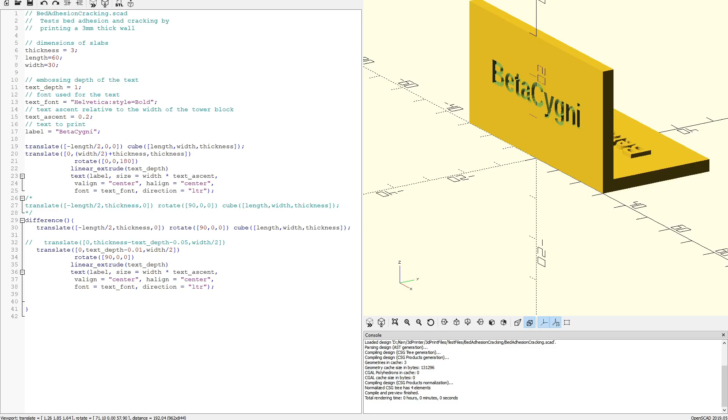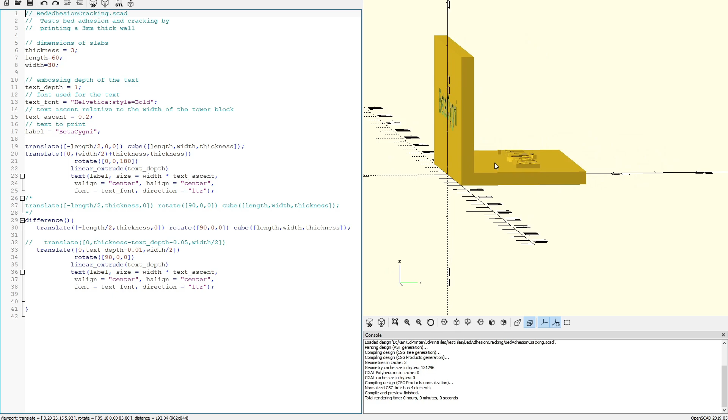Alright, so that test went well, and we got good bed adhesion at 40 degrees centigrade, and 225 was a good temperature for printing. I've said on other videos, I don't think there's an exact temperature that's always best. A few degrees here or there isn't going to matter that much.

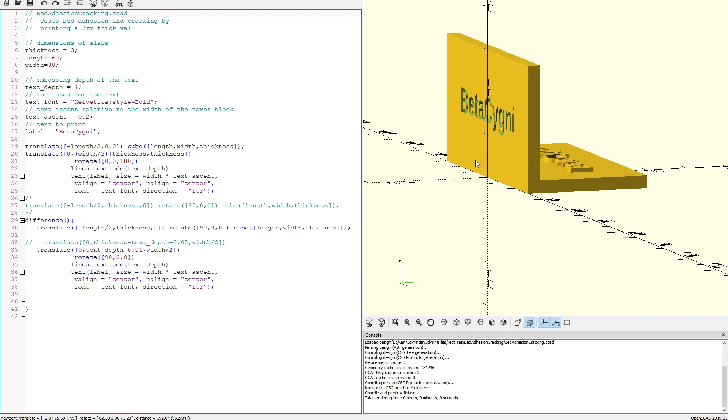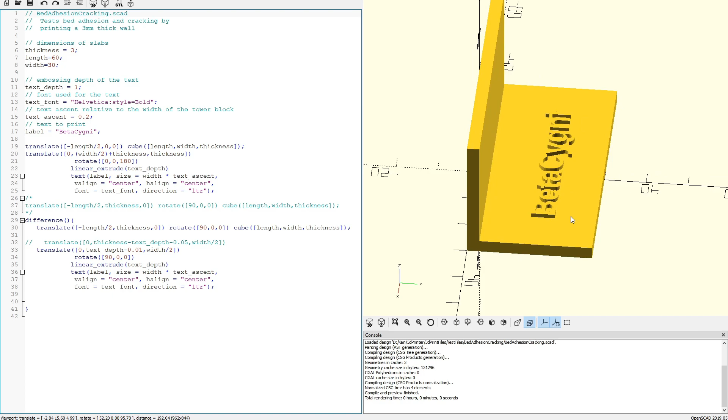And so here's my layer adhesion and cracking test. It's just a simple right angle, and the base helps test bed adhesion. So if any of the corners are curling up, it means you don't have good bed adhesion. This corner right here is the weakest point, so if you're not getting good layer adhesion, it'll crack right here. We'll be testing that when we print this.

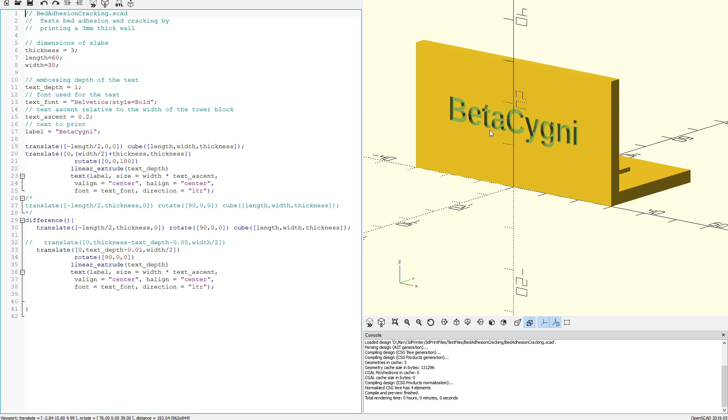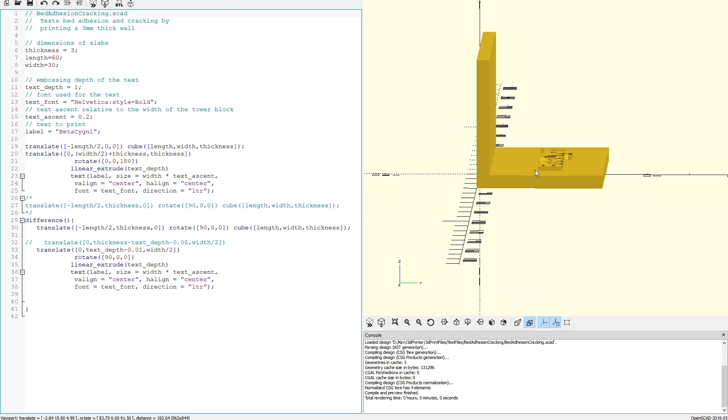Also, I threw in some raised and inset letters to see how the details are. This gives a good contrast to the flat surface to see how the cooling is working, as far as not remelting the surface when you're doing these letters in little small areas. So this is a great test.

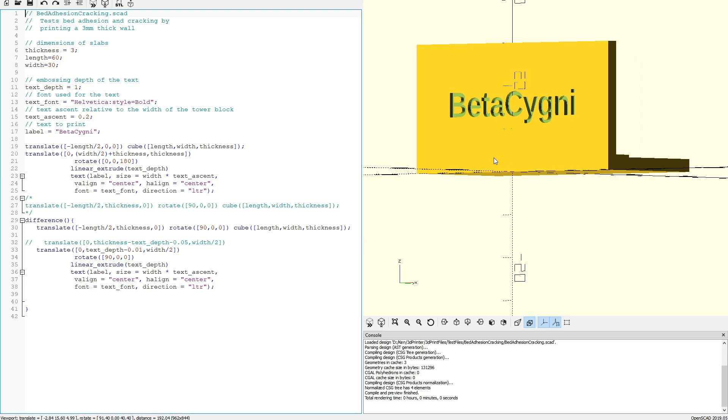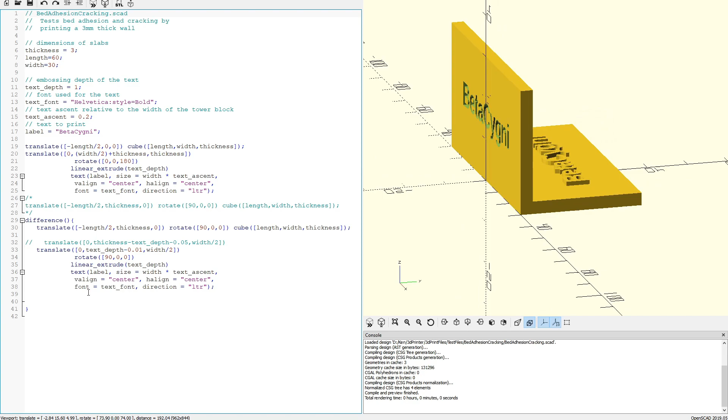The only difference is going to be when we go over to Simplify 3D and we set the temperatures and the cooling. Let's go over to there, I've already loaded it in. Here's our STL file from the OpenSCAD.

For our process, everything is default. We get the temperature, we got 40 degree bed temperature and 225 on the nozzle, and cooling after the first layer with PLA. After the first layer, we're doing 100% fan speed.

And we're helping control the temperature when it gets cold in the garage by closing the lid and the door and using a heat lamp. I've shown that on some other videos for the intake air into the printer. Because the Flashforge is an enclosed printer, you have a lot better control over the temperature, so it prints much more consistently.

I'm never going to buy an open frame 3D printer. I'm not interested, what I want is consistency.

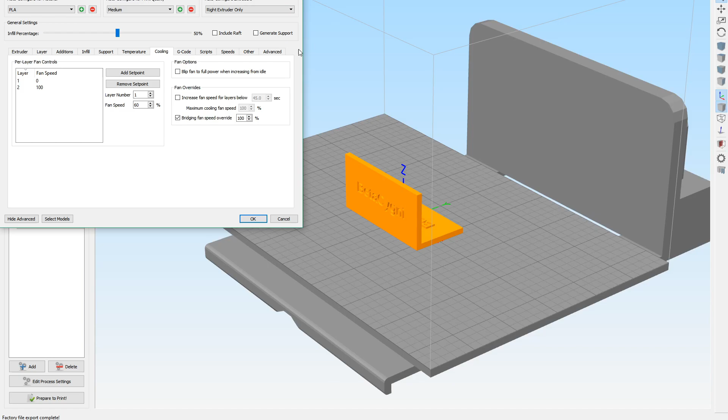Anyway, so this is okay, and we'll just prepare to print. Again, 55 minutes. These are two great tests that take less than an hour, the temperature tower and the layer adhesion and bed adhesion and cracking test. Then you've got your filament pretty well characterized after these two, so you're ready to go on and do bigger and better things.

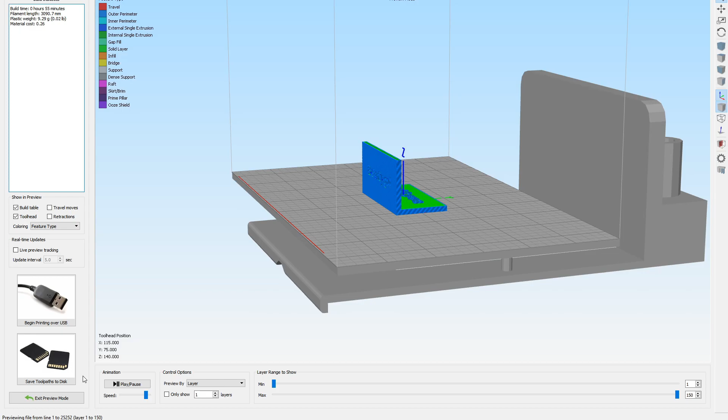So we'll put this on an SD card, and we'll come back and switch over to the time lapse, and then we'll come back and see how we did and do our fun print. We have a new fun print just for Halloween.

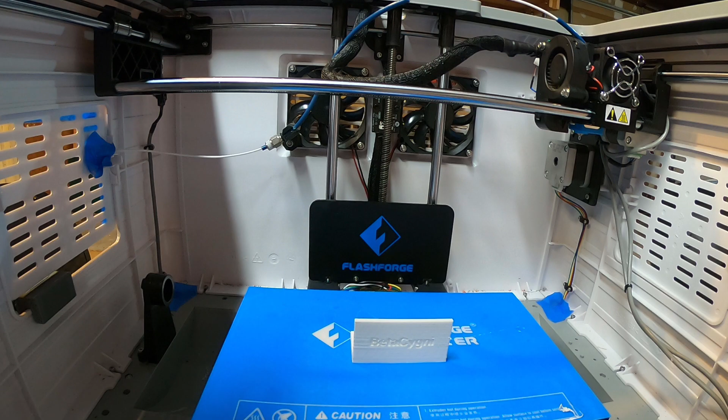Looks like another successful print. One little string.

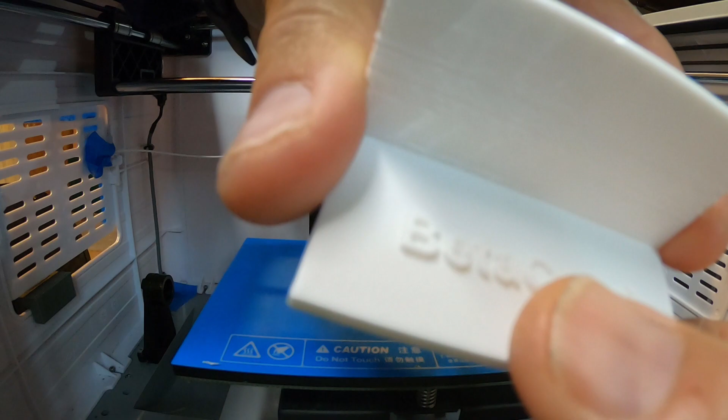Turn the light on, let's see. The surface is shiny, that's a good sign. The letters are well defined, and the inset letters are good.

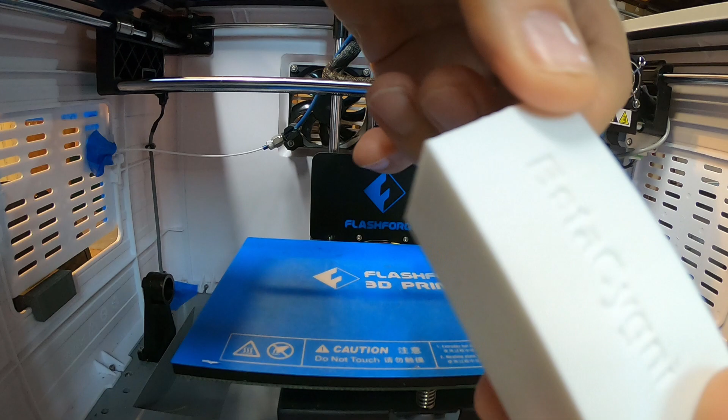Now this is the test, we're going to squeeze here. This doesn't crack, it's solid. I'm pressing really hard. If I press harder, I bet I could crack it if I press really hard. But this is nice and solid.

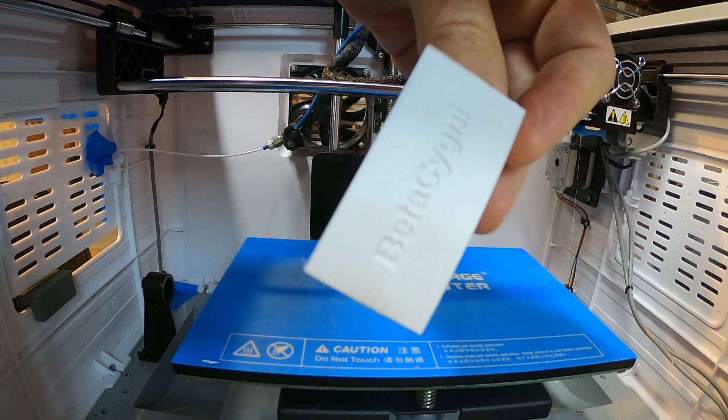So we got our cooling, temperature and cooling settings right. Layer adhesion is a function of two things: extrusion temperature and cooling fan speed. With PLA, you normally want a pretty high fan speed, so I'm using 100%. And if the temperature is correct and the cooling is set up correctly, then you get good layer adhesion and these kind of things won't crack.

Alright, so that's great, looking good. So now we're going to go on to our fun print. I'll do that on the computer, and then we'll come back here and do a time lapse.

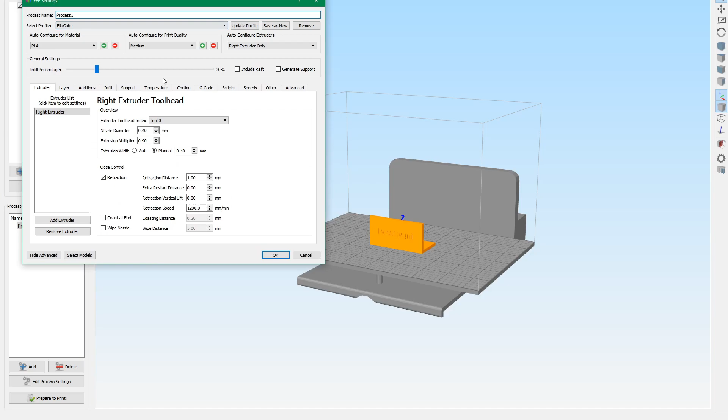Okay, so that test went well. So we're going to go ahead and save this, since all the FilaCubes are printing pretty much the same. We're just going to have a profile called FilaCube where we do the 100% fan after the second layer, and temperature 40-degree bed, 225 nozzle. Everything else we have pretty much the same.

Haven't really needed this 125% layer. Usually 110 is plenty to get it to stick, so I'm going to go ahead and get rid of that. No reason to waste extra filament. It also makes a little foot at the bottom of the part, so we don't really want that either.

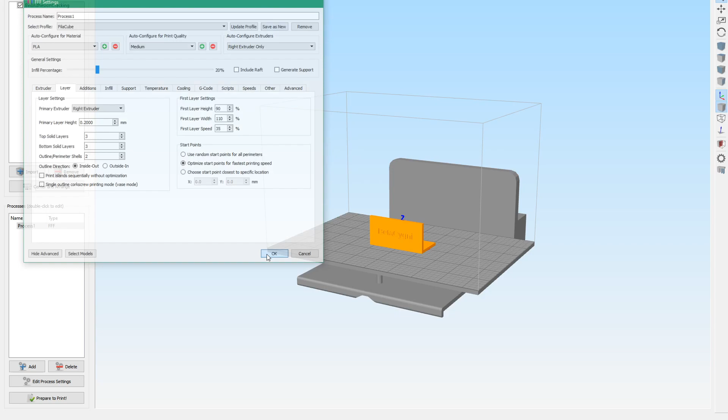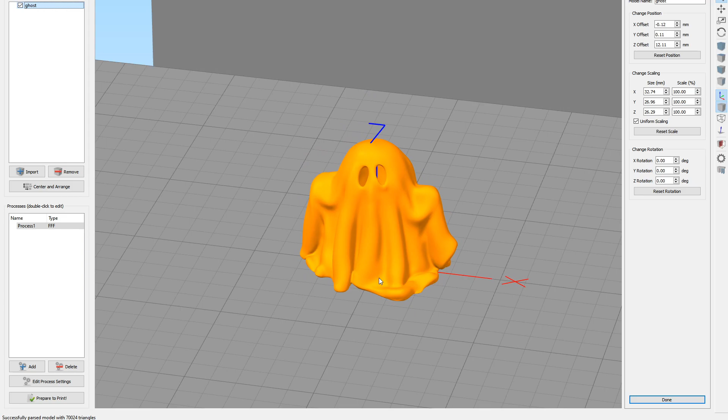So this was good. Now we'll do our fun print, because it's October, so we're going to print this ghost. Seems like a good thing to print in white. This is a ghost that doesn't require any supports. It's hollow in the middle, so we'll see how well that works.

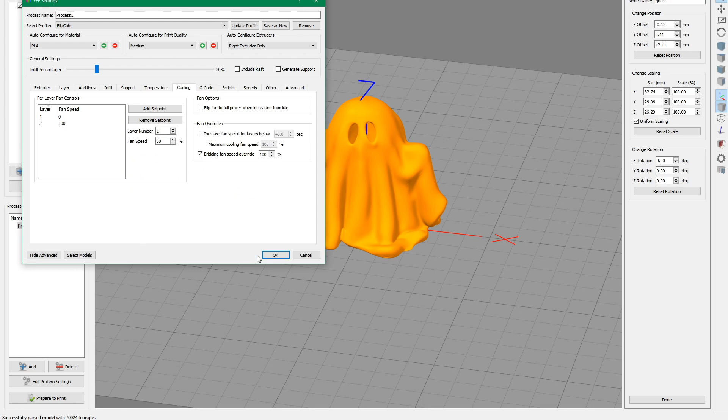And we did print this on the... I created this project and I've just used this filament as a template, but we're going to use the FilaCube. So again, temperature 225, cooling 100%, and the layer has got 110%. So we're going to print this and see how long it takes.

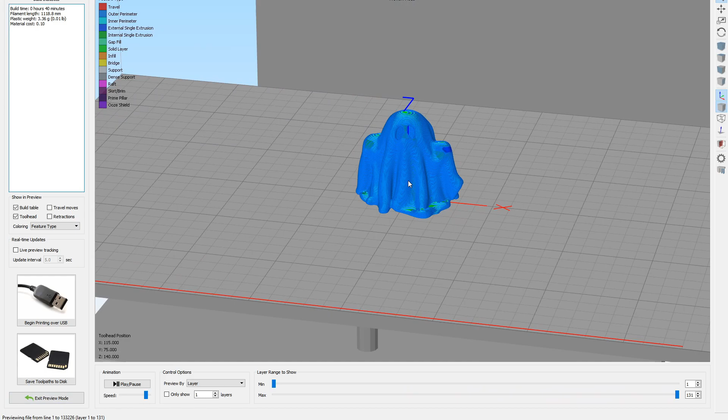This comes in different sizes. This is the smallest. This is just a test print for fun. I don't want to use a lot of filament and time printing this. It only takes 40 minutes to print, so that's a good size for a fun print. We'll just check the layering here and see if we see any issues when it does the eyes.

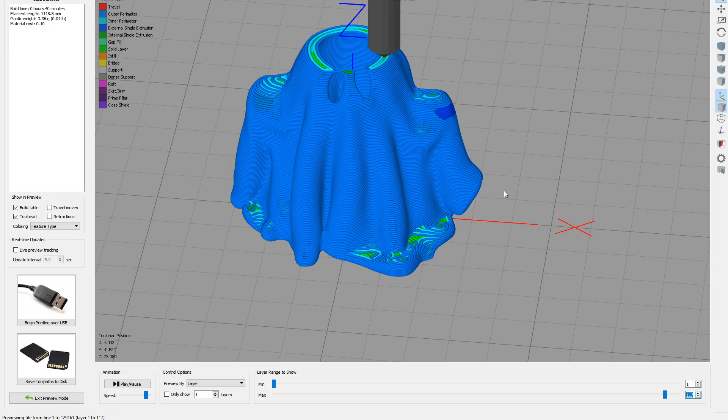They're ovals, so when it gets closer to the top, there's no problem bridging across the top there. Right in here, it's bridging, and pretty soon it'll bridge this eye. See, that's a pretty short distance, so it should do that easily without any supports.

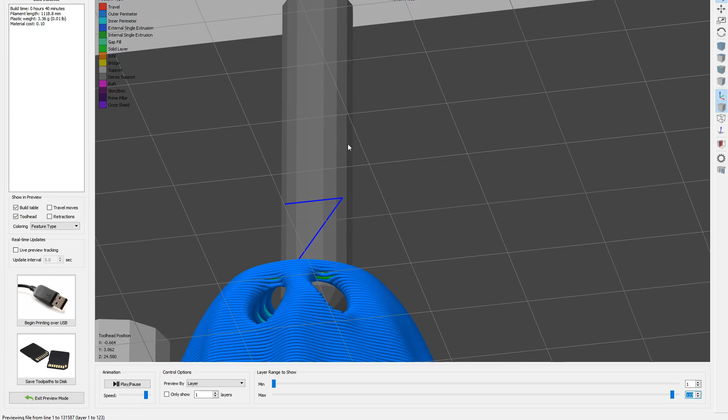And then the top is a cone. If you look from the bottom, it's making a cone shape, which again is just overlapping the previous layer slightly, and there's no problem printing that without any supports. So I try to avoid supports. Sometimes they're unavoidable, but I try to avoid them if I can.

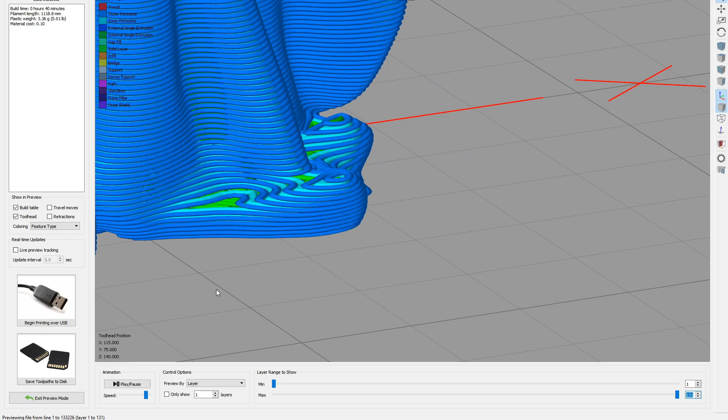And then this area over here is steeper than 45 degrees. There should be no problem printing this with any quality filament. It should stick together, assuming you have it dialed in. So this is a good test to make sure we have it dialed in, because we have some overhangs and some bridging. So this is a fun test and also useful.

All right, so it only takes 40 minutes and only uses a little over 3 and a third grams, so that's great. We'll save this to a SD card and try it in the printer, and then switch over to the time lapse.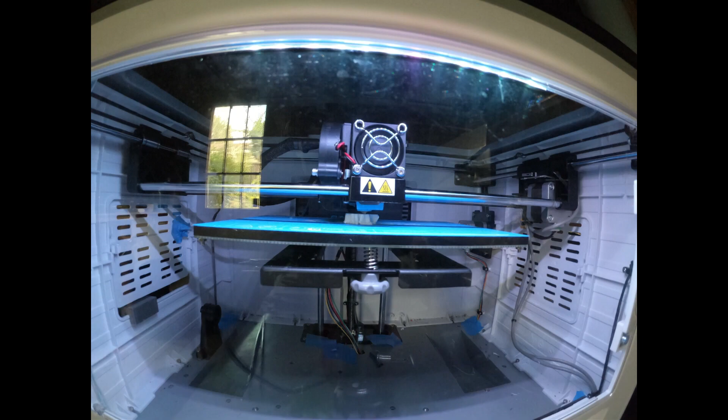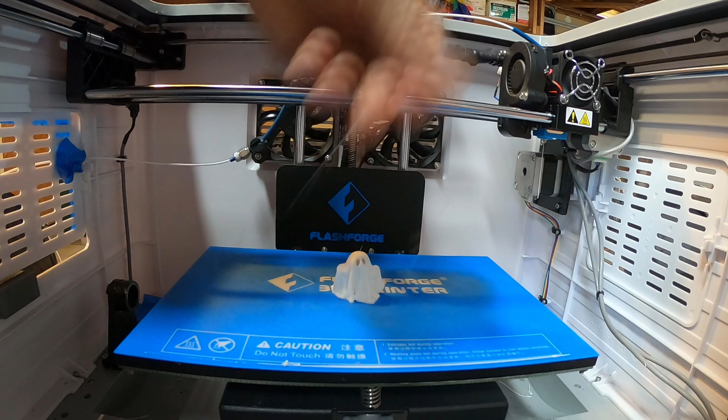He's cute. So what's the string hanging off the end? Okay, let's see how we did.

I'll turn this other light on. And he's nice and on the bed. That's good.

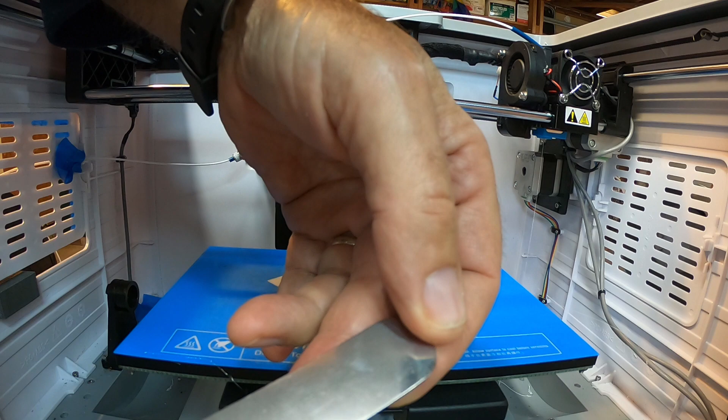So we can get out there. Yeah, so this is a little hard to see. I think you can see it now. This is a shaved spatula, a little bit tapered on this side. This side is flat. So if you put this side on top and give it a little bit of flex, you can really get under almost anything.

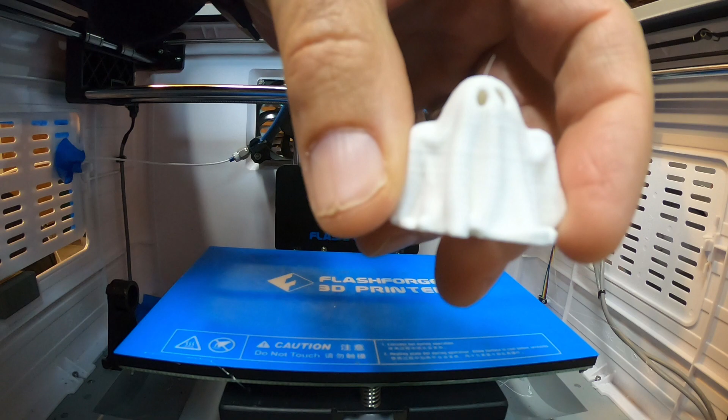All right, there's our little ghost for Halloween. You can see the layer lines pretty well, which isn't necessarily a good thing. If I printed it again, I could print 0.1 millimeter layers and it would look better. But I think it came out great.

A little bit of stringing, but no big deal. So all the overhangs are fine. The eyes bridged perfectly, so I think we got this filament dialed in. A little bit of gapping here on the back, but that's okay. Anyway, I think we got this filament dialed in.

It's time to print our real thing that we've been working on, designing for our new product. So I'll show that after this, and hope you like it.

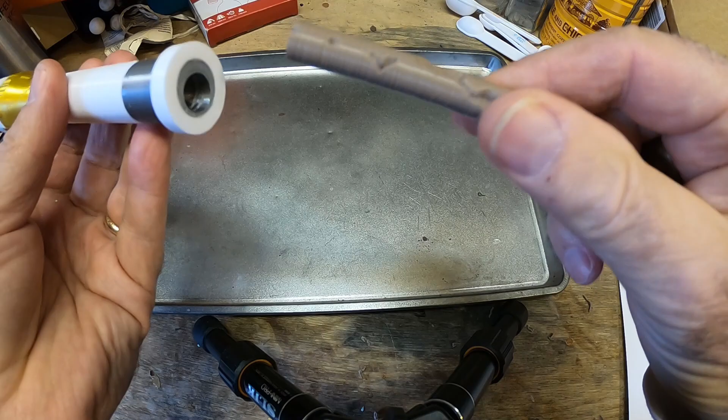All right, so I wanted to show you what I did with my white filament that I just showed you how to test. I designed this strange looking object here, and before I tell you what it is, I'll show you. It also has something that comes out, which is also strange looking. So what I made was a replica of the first core sample taken by Perseverance, the Mars rover.

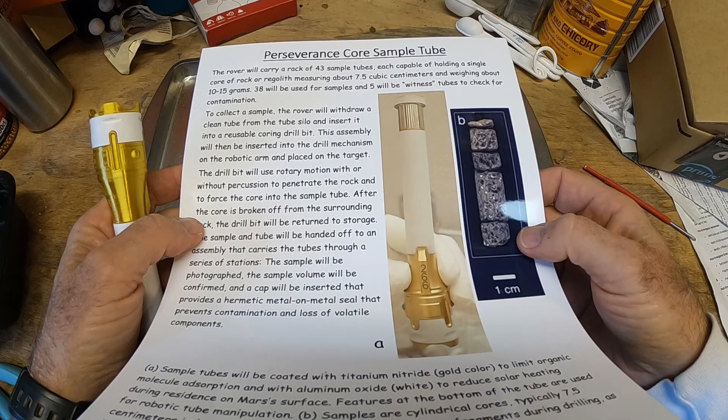So besides my Star Wars stuff, I also make space model replicas. I have an Ingenuity helicopter, that's the Mars helicopter. I have a model of that you can get on my Etsy store. I also have this new sample tube. So this is taking a core sample that's going to be returned to Earth eventually, so they find out what the inside of rocks on Mars are all about. So that's what I used the white filament for.